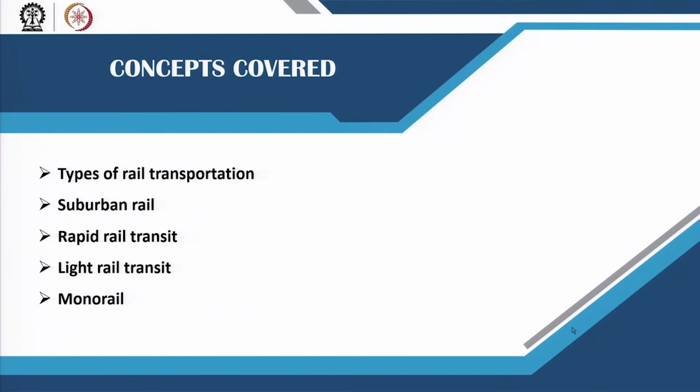Now let us introduce you to the topic of urban rail transportation. In this lecture we will look at the different types of rail transportation, especially focusing on urban rail transportation. We will look a little bit about suburban rails, and then start looking about the mass rapid transit systems of metros, light rail, and give you an overview about what monorail is, how they can be planned for, what are their capacities, and so on and so forth.

In India, when we talk about urban rail transport, we are usually talking about either suburban commuter rails, which are available in some of the large metropolitan cities, or talking about rapid rail transit, otherwise called metro rail. We are also talking about light rail transit in India. Not many cities have it, but we are now planning for light rail transit in some of the cities, and also monorail systems, which exist only in one city in India, but we will give you an idea about what monorail systems are and how and what are their capacities and how they can be planned for.

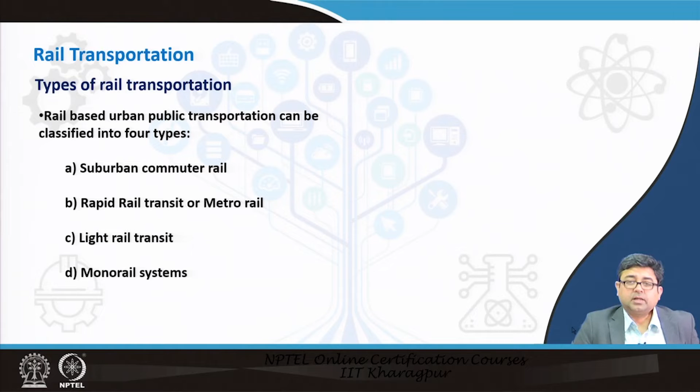Suburban rails are something that has been there for a long period of time in India. They are primarily there in all the four large metropolitan cities, and now they are coming up in a couple more cities as well. The main objective of suburban rail is to help people settle in suburban locations. As the city started expanding, people started living further and further away. So in order to connect all of these suburban areas to the city, it was envisioned that there should be specific rail systems for everyday commuters.

We already have intercity rail transport, but those are for longer distances of travel, whereas if you are within an hour or an hour and a half, or even two hours sometimes, which becomes even more tiring, but ideally around two hours away, you are usually connected by some sort of suburban rail transport system.

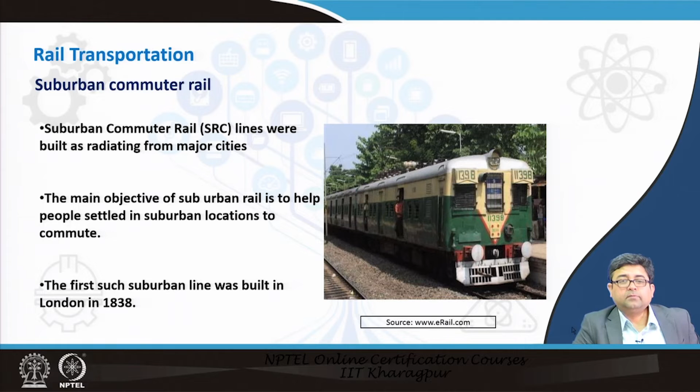The first one, of course, was built way back in 1838 for London.

Currently, suburban rail has a lot of issues in India, especially centering around overcrowding, because of the lack of any other mode of reliable transport from these large suburban areas. The rail system is almost always overcrowded. A very popular picture that you often see is the overcrowded suburban rails of Mumbai, which face a lot of safety issues as well, concerns during flooding, concerns during peak hours of travel, and so on and so forth.

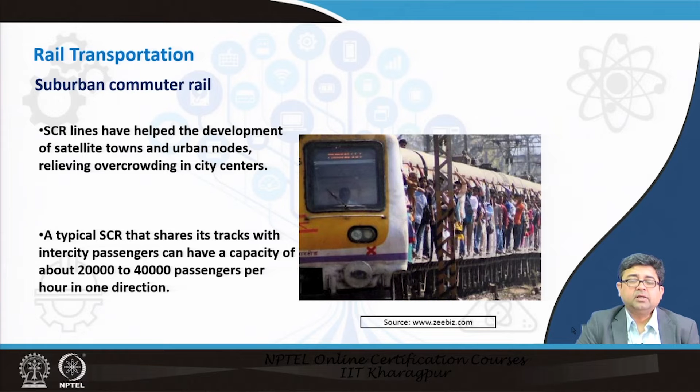Suburban rails have a very high capacity of around 20,000 to 40,000 passengers per hour in each direction, but due to the frequency of the rails, or due to the number of trains that can be run on each line, they almost always face a lot of overcrowding.

So, in order to modernize, or in order to improve the quality provided by rail transportation, people have now started to look at metro rail systems across different cities. Metro rail systems are rail systems that can travel faster. They can attain a higher speed than suburban rail systems, and in doing so, they can transport more people per hour per direction.

Metro rail systems have been developed. The first one in India was developed in Kolkata, and now we have several metro rail systems in India in multiple cities, and the network is also very well developed. For example, the New Delhi Metro Rail network is one of the most widely reaching networks in the country.

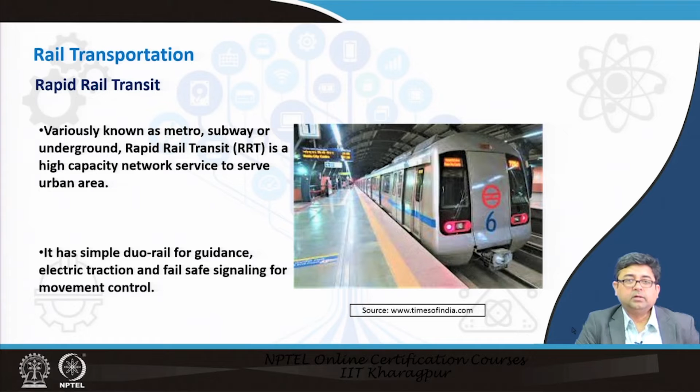There are specific systems or subsystems within the larger metro rail system. It has to have separate stations; it cannot have the same stations as the suburban rail. The signaling systems are much more efficient. It has specialized fare collection systems that have been introduced, and also the boarding and alighting facilities are controlled through automated doors.

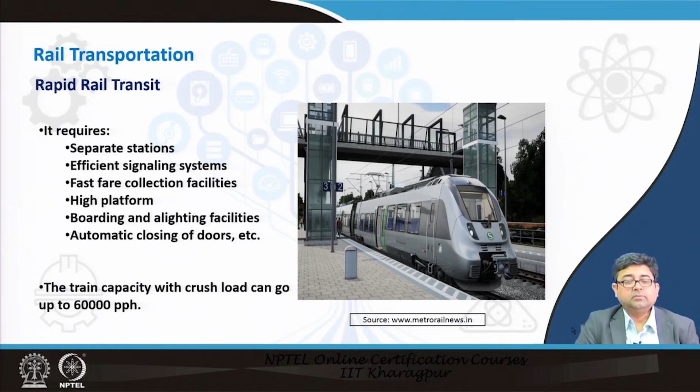Remember, the suburban rail capacity was somewhere between 20,000 to 40,000 passengers per hour per direction, whereas this can go up to, in peak hours, metro rail can take up to 60,000 passengers per hour.

From the cost and economy considerations, planners recommend that once your city's population grows beyond 2 million, you should start thinking about rapid rail transit or metro rails. This is one of the main drivers of public transportation - the population and also the population density. If you don't have enough population density in your city, it becomes challenging to operate your mass rapid transit systems efficiently.

Especially if you see larger cities that are sprawled out across the world, they cannot sustain a mass rapid transit system just because of their population density. So if you have sprawled out cities with lower densities, mass metro rail systems become inefficient, whereas if you have dense high population density, which is the case with most of our urban areas, metro rail does become very viable.

However, you have to have certain thresholds because construction of metro rail is usually very expensive, and so to make it financially viable, you have to have a certain amount of ridership that can be attracted.

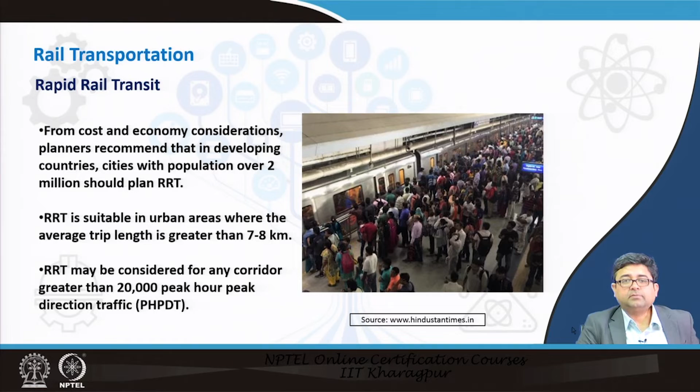Now, metro rail systems, as you may already know, can be either above ground or below ground. The costs vary significantly, but that is a call that has to be taken by your local administration or the agency constructing the metro. There are pros and cons for both.

Although elevated structures cost less compared to digging underground tunnels where the metro would run, people are averse to overground structures because they might create a lot of noise, and visually they may not be very appealing for a city to have a lot of lines running on top of them - just like we do not like overhead electric wires hanging around on top of us.

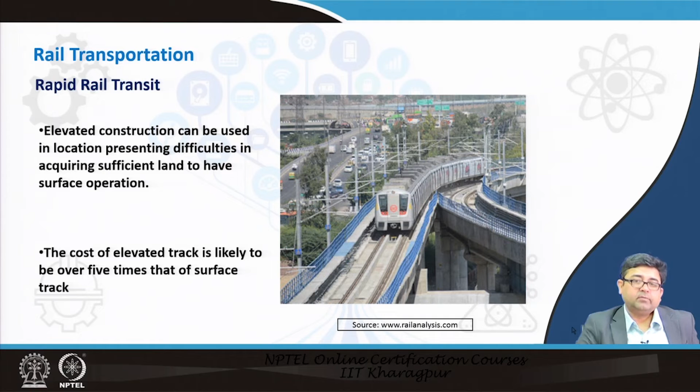Given here is an example of prices looked at back in 2007 when Chennai Rapid Rail or Chennai Metro was being envisioned. You could see the cost per kilometer - these are all 2007 numbers. If you were to have it at surface, it would be 40 million rupees per kilometer, whereas if you had to put it underground, it would be almost 900 million. That is a huge cost.

So especially keeping in mind the huge costs in metro rails, usually what many planning authorities or agencies do is have alternative assessments of whether a light rail transit system can be more cost effective compared to a metro rail, or whether a BRTS could be more cost effective compared to a metro rail. So there is always an alternative available just because of the prohibitive nature of the cost involved in building metro rail systems.

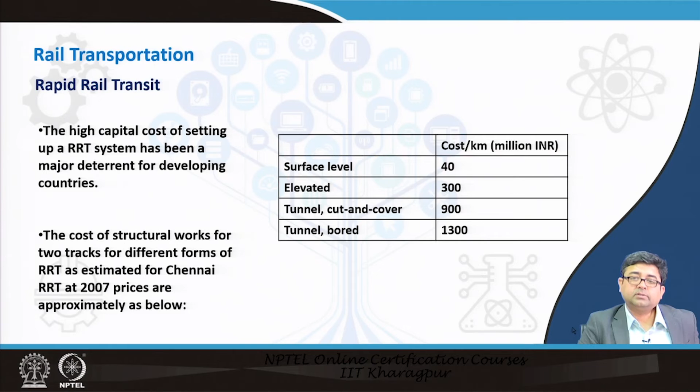This is an example of an underground tunnel constructed for a metro rail line. A large section of Kolkata's first metro line was underground, most of it actually. However, now the extensions are mostly overground, apart from a small stretch that is going under the river Hooghly to connect to the Howrah rail station, which is again underground.

The underground construction costs include not only traffic dislocation but diversion of other underground services like electric supply and water supply. So just relocation of utilities also takes a lot of cost when you are trying to put something underground.

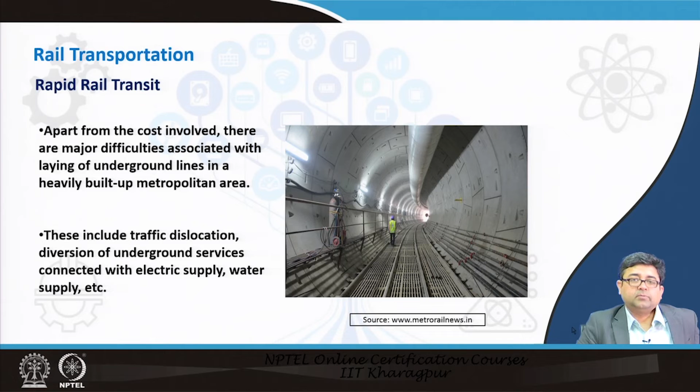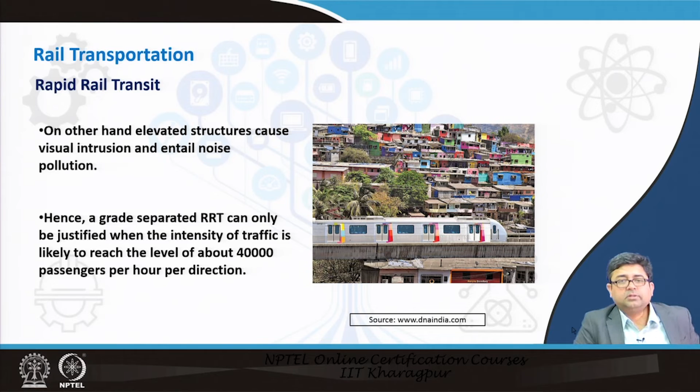We have already talked about the implications of overground metro rail systems, where it may create noise and not a great visual. A typical cross section of an elevated metro rail system and an at-grade metro rail system are shown here. You see that for a metro rail system, you have to have enough space for two lines, up and down, and also at a station. This is a cross section of a metro rail station at grade. You have to have a concourse level as well, and all the other amenities such as lifts and stairs that take you on and off the metro rail.

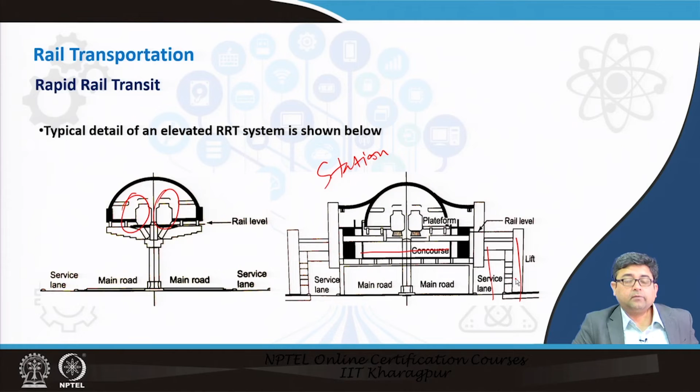Now coming to the next type of urban public transportation system, called light rail. Many of you may have seen light rail systems from across the world. In India, we do not have a fully operating light rail system. What we have is a tram system in Kolkata, which is very similar to a light rail system, but they are not segregated from other traffic and do not have a dedicated right of way. That is the only difference between a light rail system, an LRT, and a tram system, where trams mix with other kinds of traffic, whereas LRT is generally segregated from other traffic.

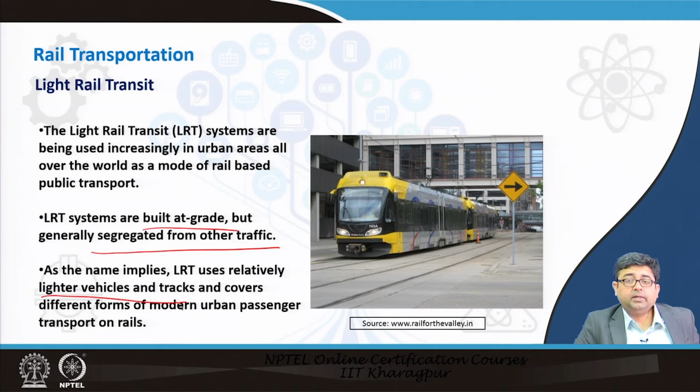Both of them are built at grade. LRT usually uses lighter vehicles, so the costs are much lesser than a metro rail system, and being at grade also helps in reducing the cost.

Unlike popular perception that LRT may carry fewer passengers, it is not so. LRT is also recommended when traffic is around 20,000 but less than that in peak hour, peak direction traffic, and can be planned at a threshold of 1 million population itself. The same average trip length of 7 to 8 kilometers used for a metro rail system can also justify putting in a light rail system.

The only objection several times people have is they feel that light rail systems may intermingle with other modes, as shown here, and hence may be delayed. But usually it is not the case. Although it is at grade, it does have some kind of dedicated right of way where cars and other traffic cannot mingle with it, unlike tram systems which have no dedicated right of way.

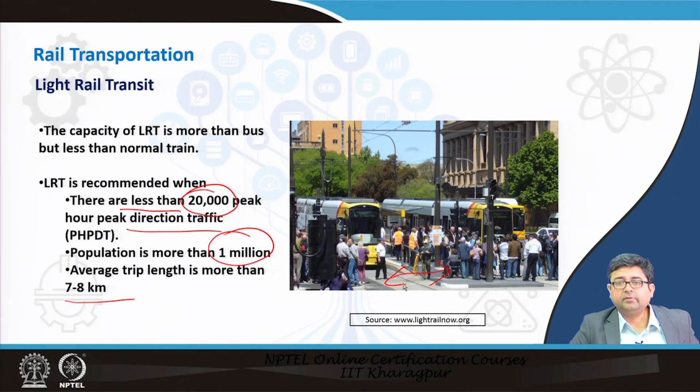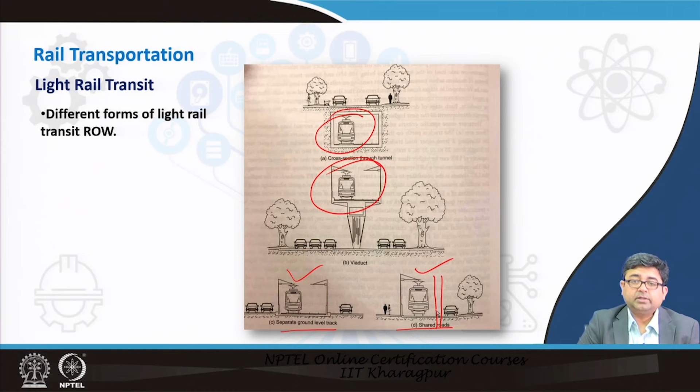Shown here are alternate types of LRT systems that you can also have. Some do have underground and overground LRT systems, but usually, due to cost, those are not preferred. They are usually at grade, separated at ground level, and when shared with roads, there is still some kind of separation between themselves and the traffic.

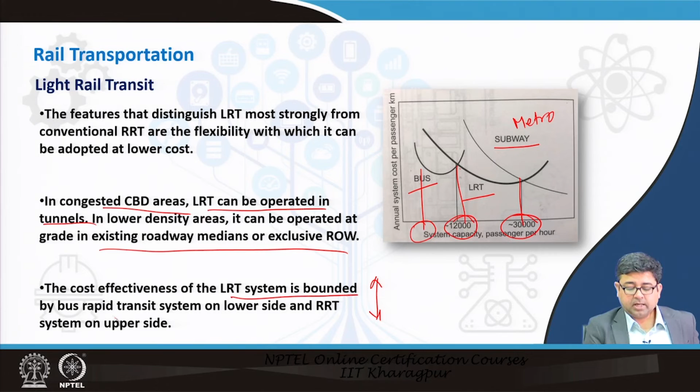In congested CBD areas especially, LRT can be operated in tunnels. However, in lower density suburban areas, it can run on existing median roads. Tunnels do increase the cost, but there are instances where they are used. Broadly, if you wanted to see where the costs of LRT systems fall, you could say that LRT cost is more than a bus rapid system, but less than a metro rail system.

Finally, if you talk about another type of public transportation system, that would be monorails. Monorail comprises of a single rail serving as a guideway, with vehicles suspended from or straddling the guideway.

These are systems that have not become very popular across the world, but are available at certain locations within cities. The major advantage is that it requires a smaller structure than is required for a metro system, and hence the cost of constructing the infrastructure and also the maintenance cost is lower.

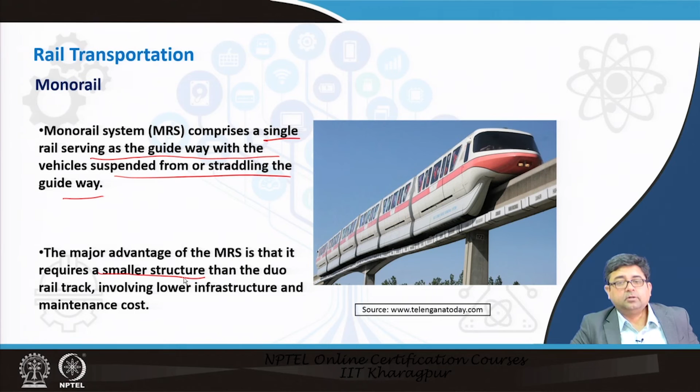But at the same time, it can also carry fewer number of passengers. So, when you already have an overcrowded public transportation system and you want to enhance it, usually people do not go for a monorail system because they cannot carry too many people.

However, monorail systems are very popular, especially at concentrated, high intensity use areas. For example, you may have a large airport system and you may want to connect multiple terminals. In those cases, sometimes you have a form of monorail, which we'll talk about.

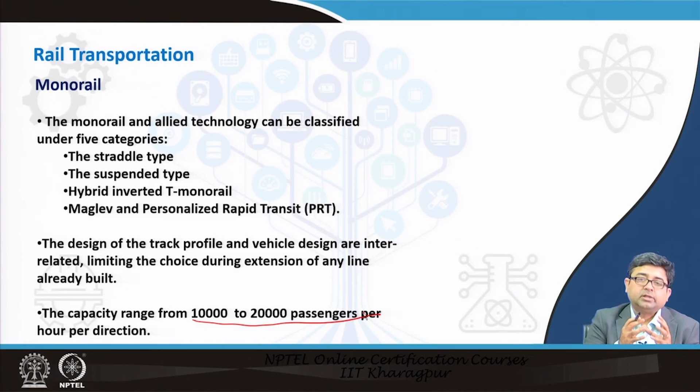At such concentrated locations for shorter duration trips, where the passenger demand is no higher than 10,000 to 20,000 per hour per direction, that is a situation where you can use monorail systems. There are different types of monorail systems.

PRT is something that is being tried at many of the airport locations I was talking about recently, to connect between two terminals. Maglev has been used in the past, but is mostly used for intercity kind of transport.

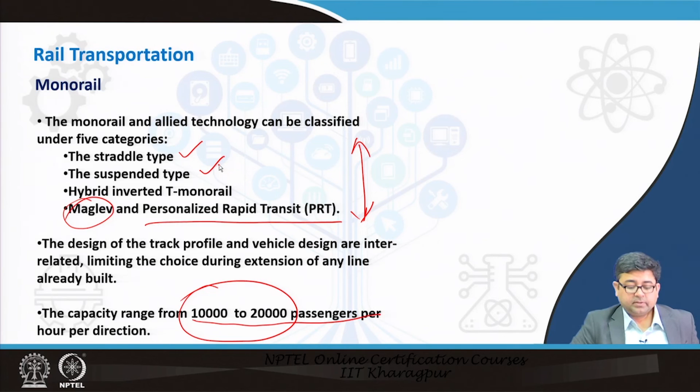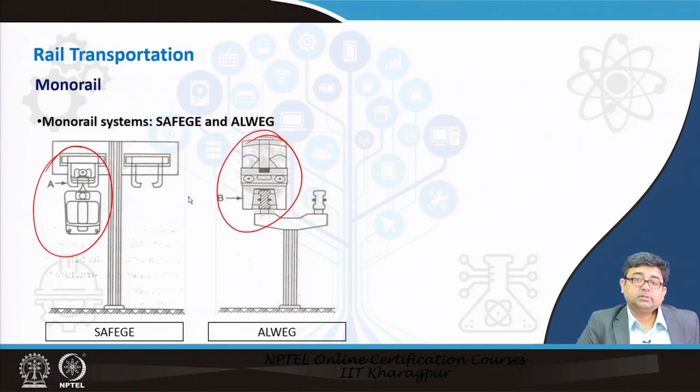And the most popular type is the straddle type or the suspended type. So you would either see a monorail suspended from a tower or structure, or it is straddling on top of a structure. These are the two different types of monorail systems that are very popular.

The last slide gives you an overview of some proposed MRTS guidelines by the government of India. Like we have already discussed, when it comes to metro rail, you have to ensure the criteria of peak hour, peak direction traffic is met on the proposed corridor. Usually what is proposed as a guideline is if you can project more than 20,000 people traveling in the peak hour in the peak direction by the year 2030, then you can start planning for a metro rail for your city.

It also has to meet the criteria of having more than 2 million people as per the 2001 census, and your average trip length should be more than 7 to 8 kilometers. So a city where average trip lengths are much shorter, metro rail would not be very helpful.

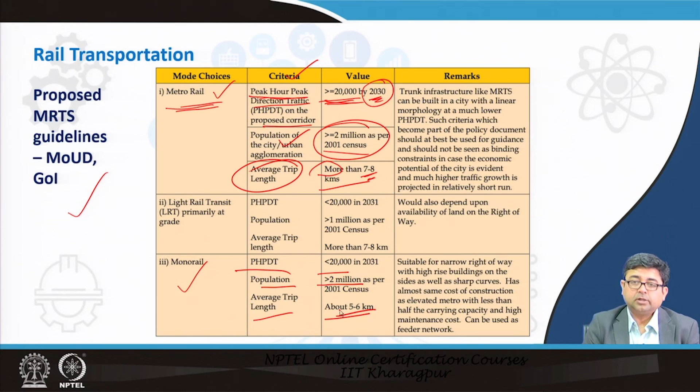If you take the other extreme and try to plan for monorail, you would see that if there are less than 20,000 trips by 2031, you can try it. Population could be more than 2 million, but your average trip length has to be much shorter. Whereas something in between is LRT, and the criteria again are given here.

This gives you a snapshot of the different types of urban rail transportation systems you can choose from for your city. These guidelines are at a policy level, and then you have to do your analysis to find out which fits your city.

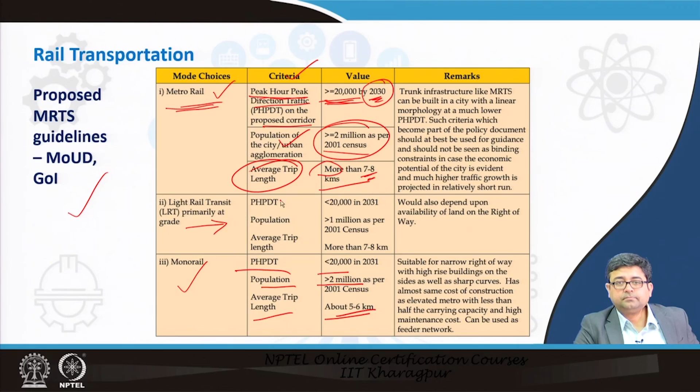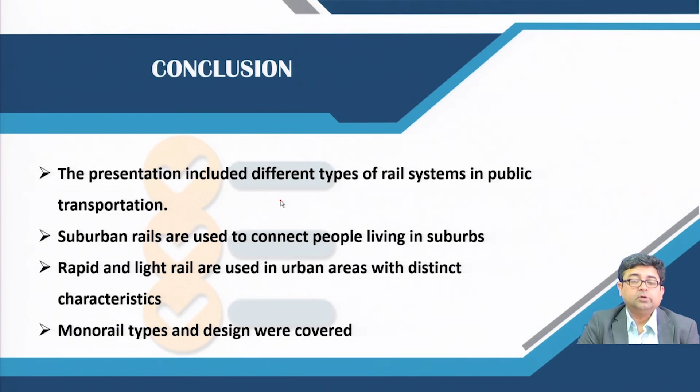That brings us to the conclusion of an overview of urban rail transport systems, where we have looked at the different types of rail transport systems, including suburban, metro rail, monorail, as well as LRT systems. We have looked at the criteria they have to fulfill before you plan for each system, and briefly how they can be designed, overground or underground, and the costs involved in each of those designs should also be kept in mind when planning.